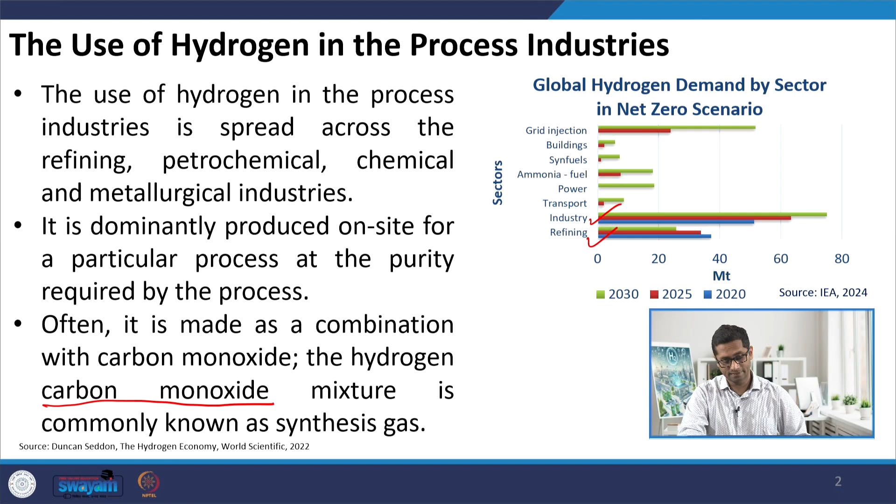So when I talk about oil refineries, we know that we are talking about a fractional distillation column, and the input to the fractional distillation column would be some kind of crude, and then this gives us different kinds of end products. The major end products that we might be aware of would be fuels like petrol, which is also known as gasoline, diesel. We might be talking about different kinds of gas. A typical gas that we use in our homes is LPG, liquefied petroleum gas, which is nothing but a mixture of propane and butane. And then there could be different grades of fuel oils as well.

This is what a typical refinery is doing, though not every refinery functions the same way, since operations differ depending on location, product demand, and the crude being processed. But generally, refineries trying to produce majority diesel and gasoline find that these two fuels tend to have a higher hydrogen to carbon ratio. For diesel, the hydrogen to carbon ratio is roughly 2, and it's somewhat lower for gasoline, around 1.8. But crude itself has a hydrogen to carbon ratio on the lower side, roughly 1.4 to 1.6.

Now, if I had to increase the hydrogen to carbon ratio of a fuel, how can I do that? There are three ways: I can either add hydrogen, or remove carbon in the form of carbon itself or as carbon dioxide. Different refineries function in slightly different ways and might adopt one or more of these methods. But the most beneficial way is to add hydrogen, because if you lose carbon, you inevitably lose energy, since carbon is also a big energy provider for these fuels. So the best way is addition of hydrogen.

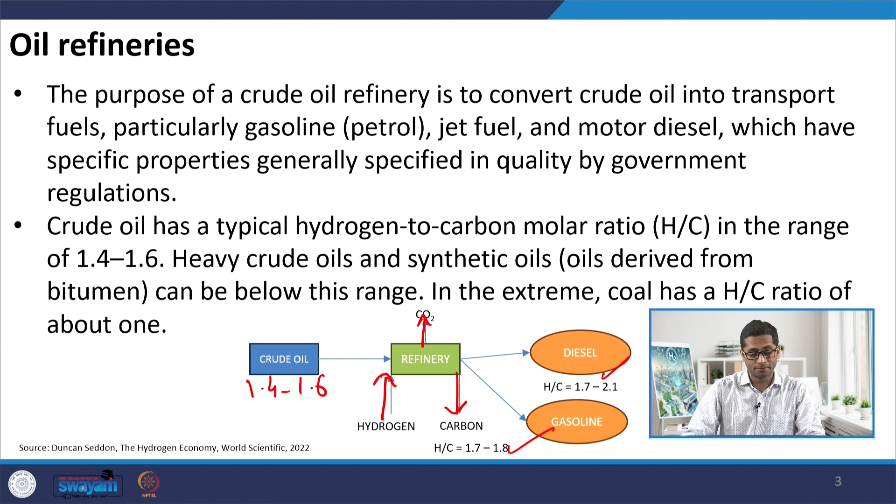Now, this addition of hydrogen has been going on for many decades. But we also notice that the use of hydrogen in refineries has been increasing over the past few years. Why would the need for hydrogen increase? We know hydrogen is needed to increase the hydrogen to carbon ratio of fuels like petrol or diesel, that makes sense. But why would the requirement increase over time? There are two factors behind this phenomenon.

One is the fuel quality, fuel standards, or emission standards that are becoming stringent day by day. Currently we use Bharat 6 standards; a few years back it was Bharat 4, before that Bharat 3. As we increase the standard to meet emission norms, fuel quality also needs to be upgraded. So if you want better quality fuel with less sulfur and other compounds, naturally you need more hydrogen for processes like hydrotreating, which removes sulfur.

Another phenomenon observed is that the crude we are importing, as time progresses, is coming from the heavier end of the crude oil spectrum. The lighter spectrum, which was on top, has already been utilized, and the crude we're extracting now is more on the heavier end. The result is we need even more hydrogen to process this kind of crude and come up with meaningful fuels we can use in our vehicles.

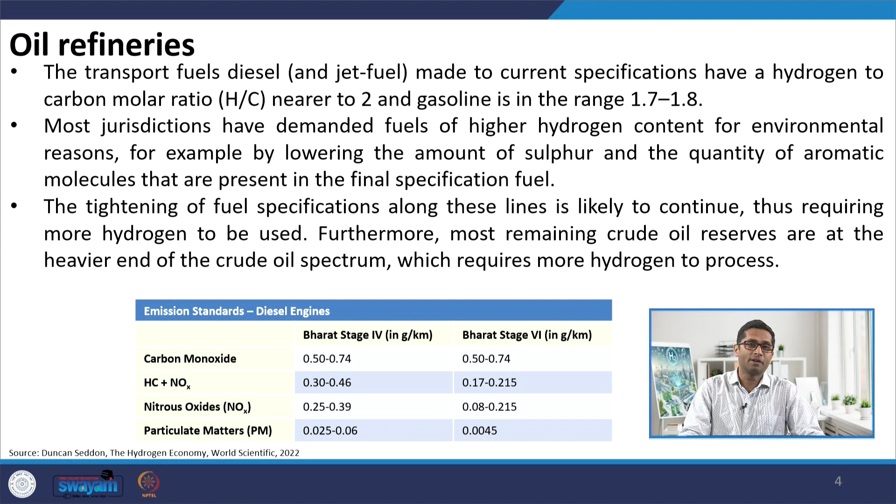So let me repeat: what has been happening in the past few years is that fuel emission standards have been becoming more stringent, so we need cleaner fuel entering our vehicles. And on the input front, the crude we are now extracting is coming from the heavier fraction, which needs even more refinement compared to earlier cases.

Now let us look at a typical refinery. Let me repeat that all refineries differ in one aspect or another, but this is what a typical refinery looks like. There could be modifications in diagrams from other literature, but to help you understand where exactly hydrogen is used in these operations, we have this small diagram in front of you. What is entering is crude.

This crude, after removal of water and a few salts, enters the atmospheric distillation column. On top, light gas escapes, and through the gas plant you get propane and other lighter gases, giving gases like LPG. This gas plant also produces butane and alkylates, used for conditioning gasoline. The middle products include different grades of naphtha, leading to gasoline, plus distillate leading to diesel. The heavier fractions go to vacuum distillation and might end up as fuel oil or other uses like asphalt.

Where do you exactly require hydrogen? These are processes called isomerization and hydrotreating, which go into almost all of the products found below naphtha, and there's also a process called hydrocracking. So these are the three main areas where you would require hydrogen. Plus, a refinery also happens to be a good producer of hydrogen - it's not that I'm only using hydrogen, I also tend to produce a good amount of it, primarily because of the naphtha reformer.

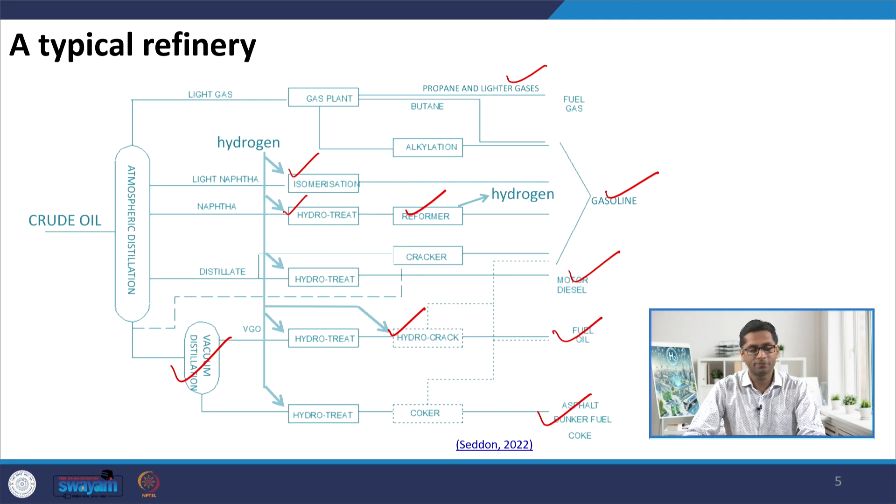Let us try to understand what all would be the aspects, and before that I'd like to give you the spectrum at which these kinds of products would be released - I am talking about the boiling points here.

If I'm talking about boiling points varying from 30 degrees Celsius to 196 degrees Celsius, I will be getting gasoline grade fuel. If I am looking from 196 to 235 degrees Celsius, it is basically kerosene and jet fuel. Above 235 going all the way to 360 degrees Celsius is diesel, and beyond 360 degrees Celsius boiling point I am going to get fuel oil.

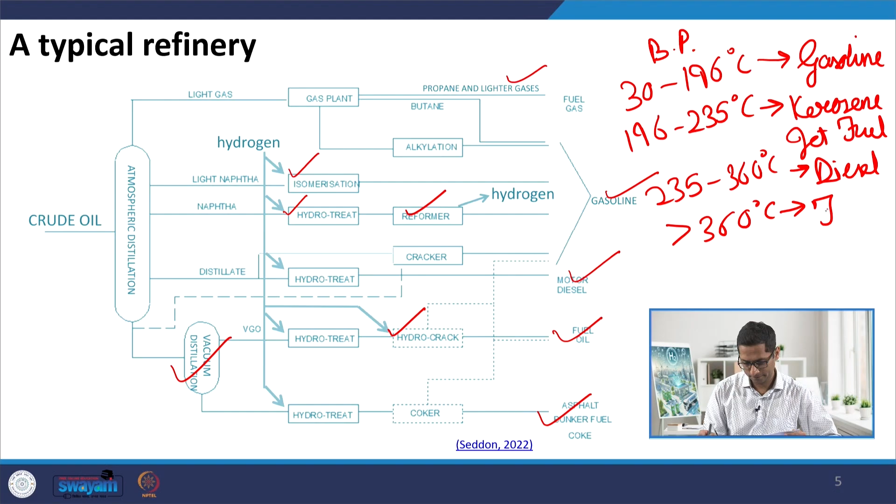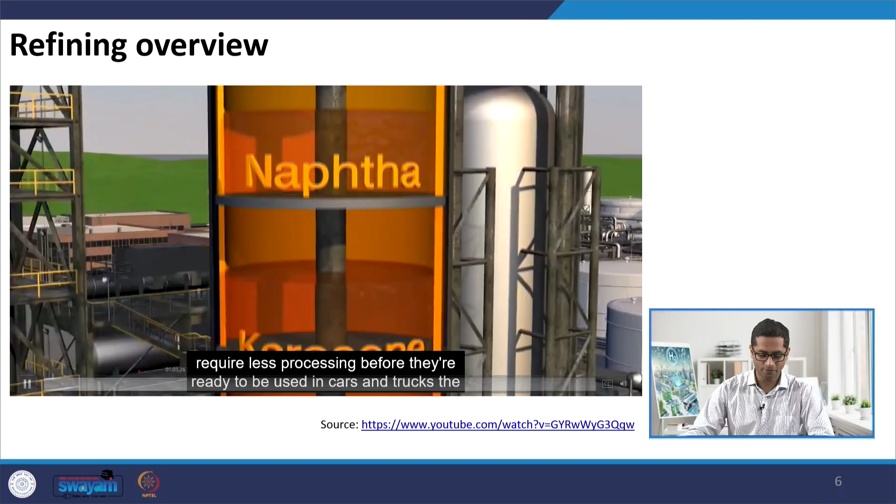Let us try to briefly understand these operations which require hydrogen in a refinery. Here is a video which I have adopted from YouTube - the link is there for your reference. This is a typical refinery, how it looks like. This is the distillation column, which separates the different aspects in terms of gasoline, naphtha, kerosene, diesel and heavy oils which might be coming in. They are just separated on the basis of the boiling point that we have.

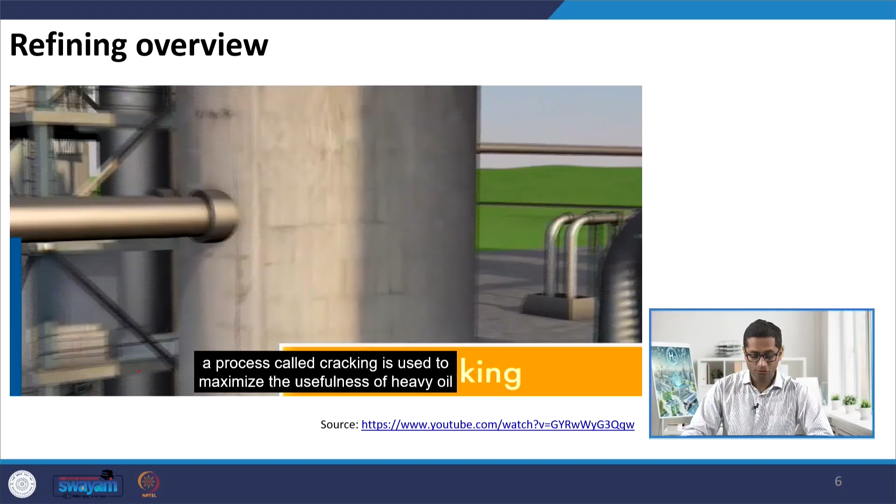But as you would see, there are a lot of processes, and one such process is called hydrocracking. In hydrocracking, we have many heavy oils or heavy naphtha which are long molecules. So for heavy naphtha, I am basically using catalyst and hydrogen for breaking these bigger molecules into smaller molecules, which could lead to an increase in the production of petrol or diesel, the primary products of a refinery. So what I am doing here is breaking bigger molecules into smaller molecules.

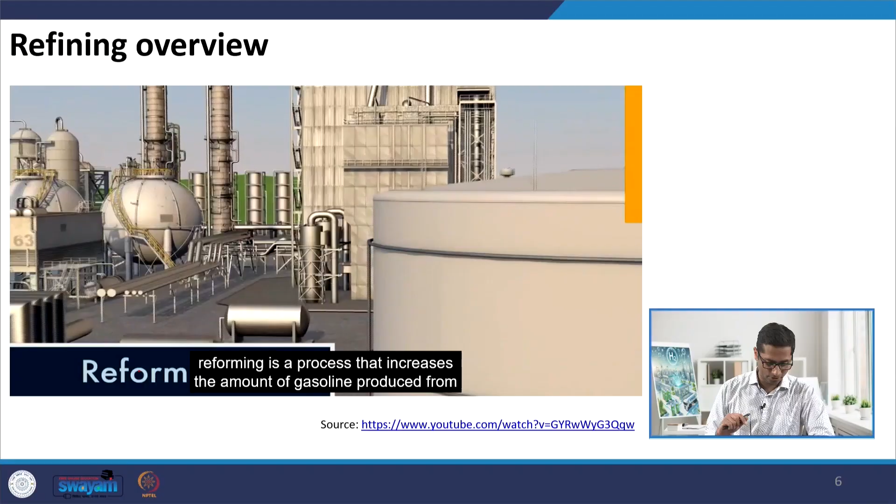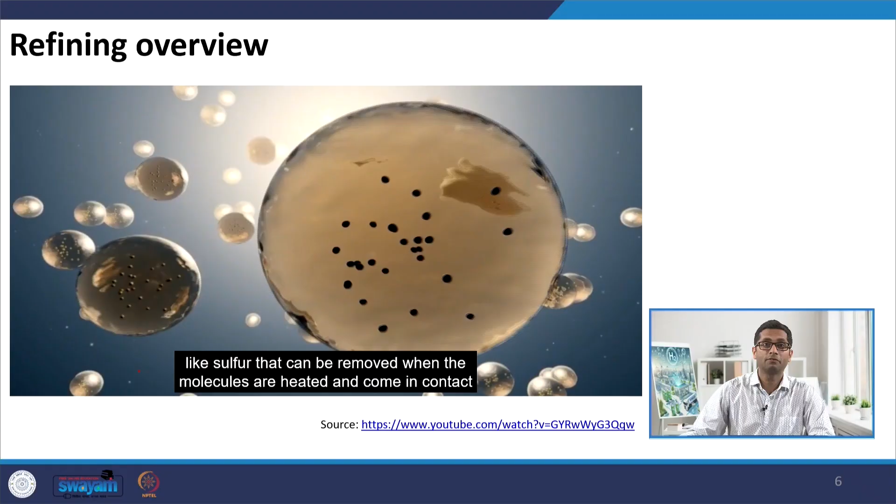Another process that is important to understand is reforming. Another is hydrotreating - here I am basically aiming to reduce or remove sulfur compounds from gasoline, the major product. The gasoline that we produce has sulfur impurities, and I could add hydrogen, which makes the sulfur escape as H2S gas, and this tends to consume somewhat of the hydrogen as well. The side products are basically used as fertilizers or other ingredients for the pharmaceutical industry. The major aim of these things is, of course, to increase the octane number of the fuel.

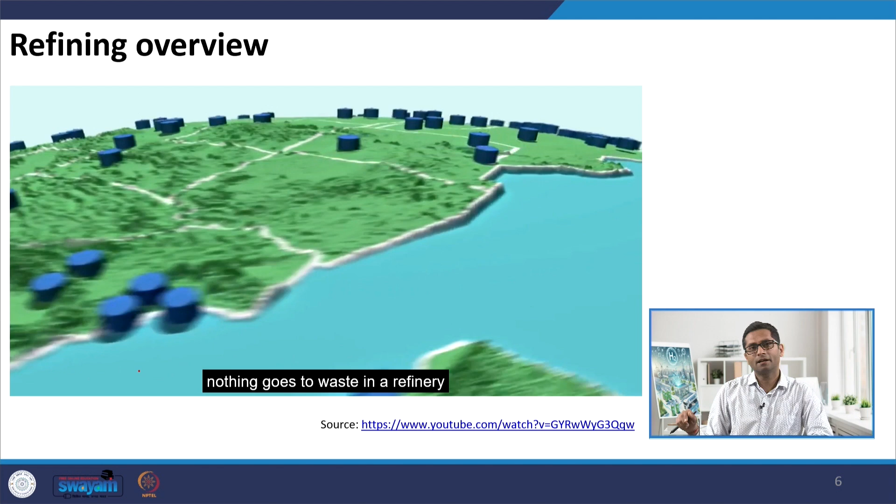Let us again try to understand this one by one. So the very first process in the refinery that is going to use hydrogen is the naphtha isomerization process. When I say isomerization, I am basically producing isomers in the naphtha range fuel - we all understand what I mean by isomers, compounds having the same molecular formula but different structure. So basically what I am doing is converting linear chain molecules into branch chain molecules. The aim here again is to increase the octane number.

So how does the process happen? You have the light naphtha entering, and after a dryer, you heat this naphtha and add hydrogen, to convert these linear chain molecules into branch chain molecules. It happens at roughly 200 degrees Celsius, and works best in the presence of catalyst, producing isomerate at the end. I'm telling you these things because I just want to explain the need of hydrogen in refineries - you are in no way required to cram or memorize these processes in detail.

If I talk about the consumption of hydrogen in a process like this, it would be of the order of 40 standard cubic feet, which is basically the volume per barrel of feed. When I am talking about standard cubic feet per barrel, this is a standard unit that is used in refinery processes.

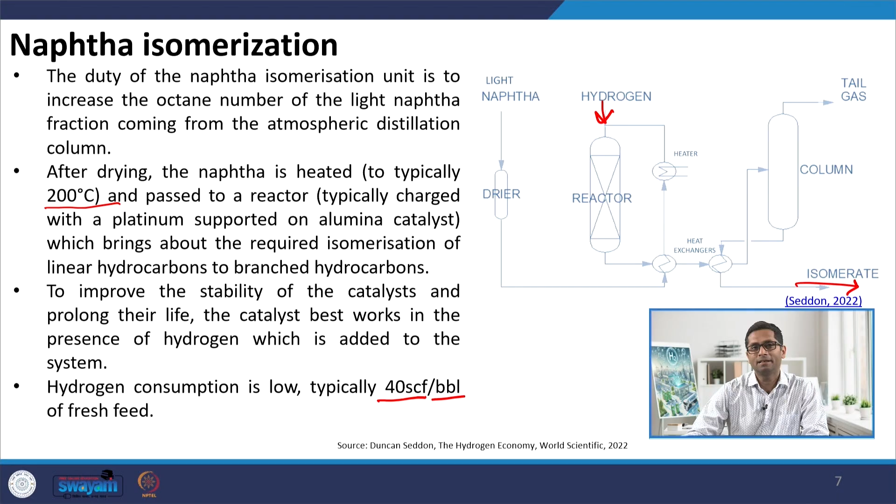But again, why am I so interested in increasing the octane number of the fuel? Because the isomerization process as well as reforming are basically aimed mainly at working towards the octane number of the fuel. Let us first try to understand that - for this we need to understand the basic difference between a petrol engine and a diesel engine.

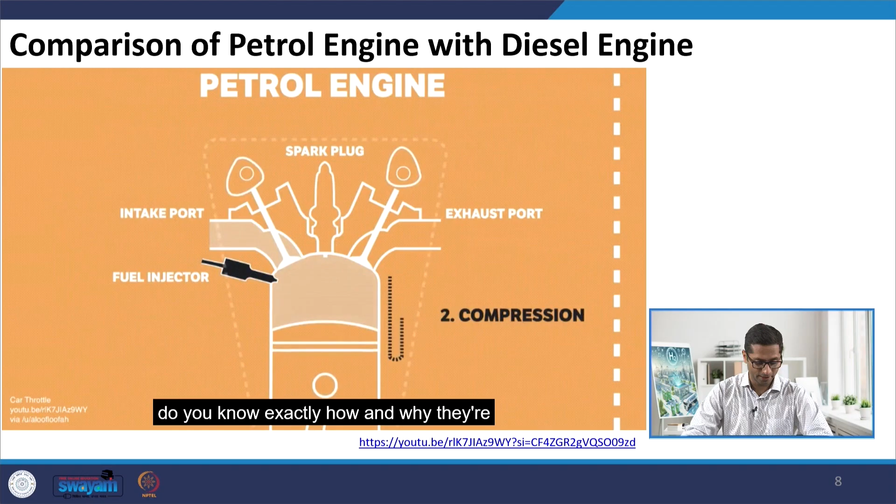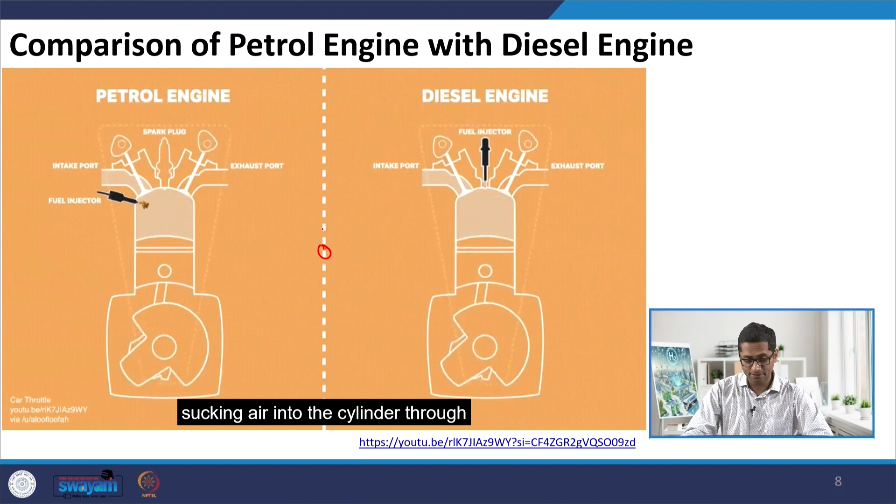When I talk about a petrol engine, we have something called a spark plug that causes the spark for the combustion of the fuel to happen. This is absent in a diesel engine. What happens in a diesel engine is that combustion happens because of compression. So if you look at the functioning of a petrol engine, during the compression stroke, combustion is made by the spark, and then we have the release of exhaust gases. Compare this with a diesel engine - there is no spark plug present here. The ignition happens during compression when the fuel is released, and the fuel gets spontaneously combusted because of compression.

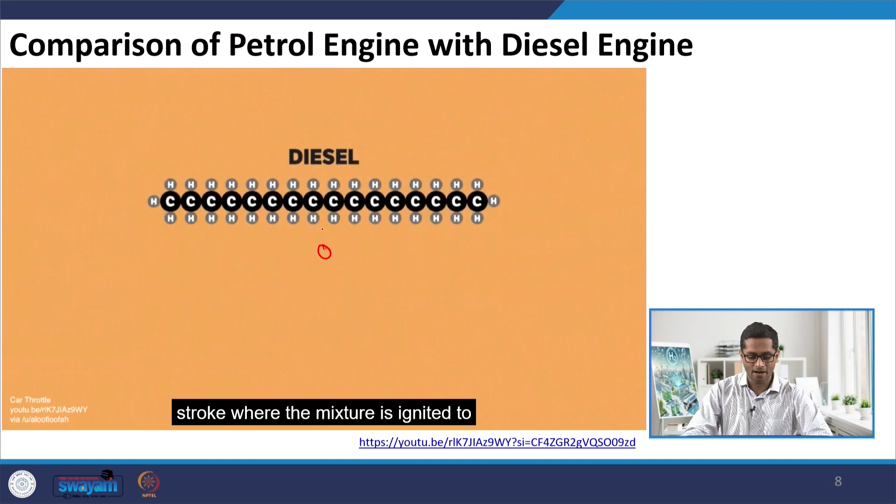We also understand that both of them deal with different kinds of fuels. Diesel deals with much bigger molecules as compared to petrol.

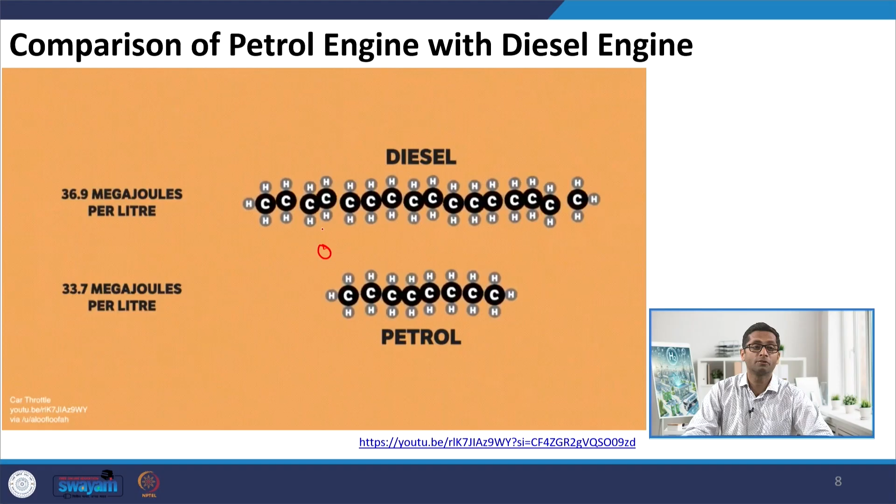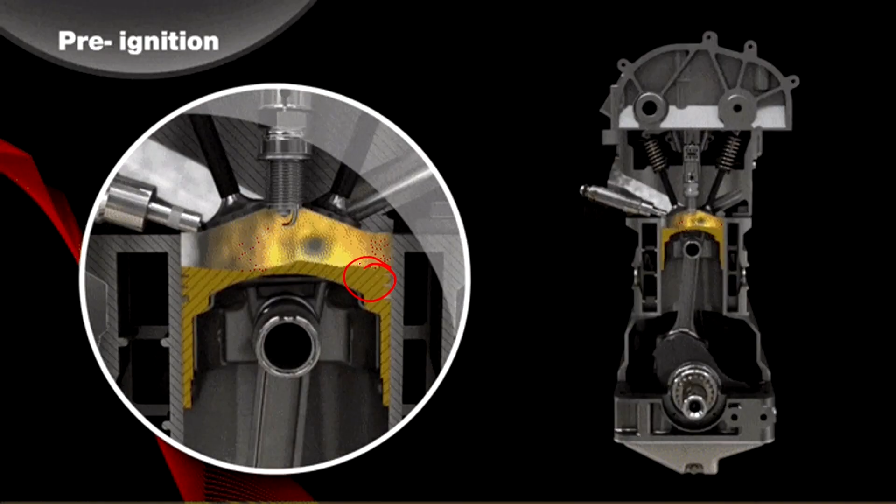What happens in a petrol engine when combustion happens because of compression even before the spark plug fires? This is what we mean by knocking - the combustion happens because of compression before the spark plug gets in. This is a normal IC engine, and you can see combustion was initiated in the compression stage just before the spark plug could plug in. This is not good for the efficiency and life of the engine, and that is why we would need a lot of pretreatment so that this phenomenon doesn't occur in reality. This phenomenon is called knocking.

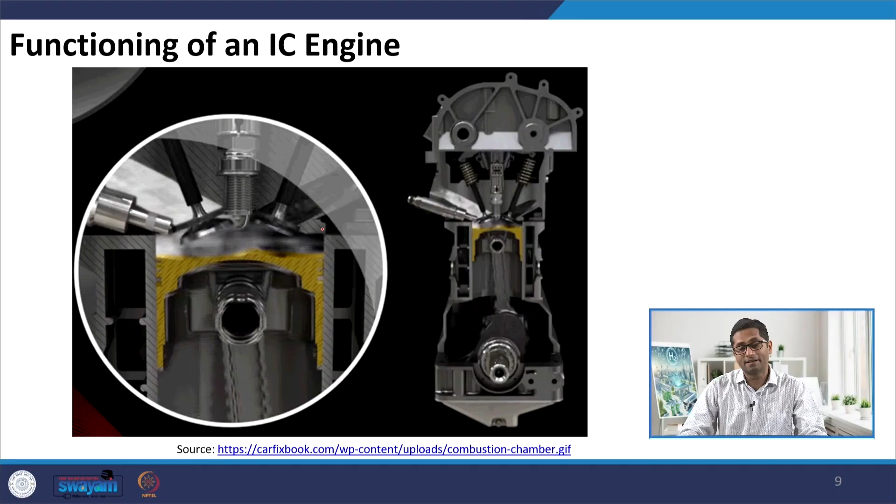To avoid this knocking phenomenon, normally we would use a high octane fuel so that it increases engine health and is also good for the efficiency of the engine.

Another place where you would normally use hydrogen is the hydrotreating of naphtha as well as the distillate. The aim of the hydrotreatment process is basically to remove sulfur from the streams.

Why would you need to remove sulfur? Because sulfur, whenever combusted, composes different grades of sulfur oxides, and when this is emitted through the tailpipes, it goes into the atmosphere, reacts with water, creates weak acids, and leads to a phenomenon in the long run called acid rain. This is why there have been a lot of problems with respect to the sulfur released into the atmosphere in the recent past.

So restrictions have been placed on the amount of sulfur that goes into the fuel, and normally this process is also called the hydrodesulfurization unit. It uses hydrogen which reacts with sulfur to create H2S gas.

The other advantages of this process - one major advantage is that not only is sulfur removed, it also removes some amount of nitrogen from the fuel, which is beneficial. Further, the removal of unsaturated molecules like olefins and diolefins also occurs, and it helps in the removal of polynuclear aromatics, also called PNAs, which helps in increasing the cetane number for diesel.

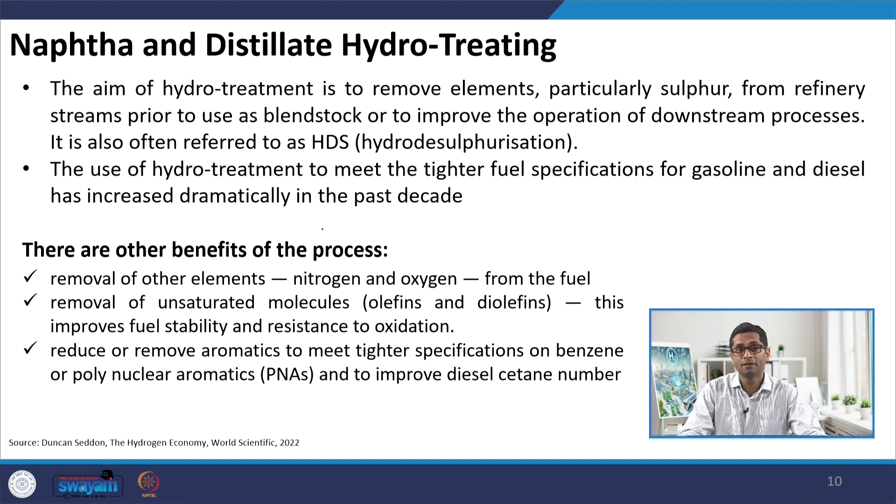Another added advantage of this hydrotreating process is that it tends to decrease the density of the fuel. As many of you would have noticed, whenever you go to the petrol pump, you pay per liter of fuel rather than per kg. So if I'm leading to a decrease in density of the fuel, I'm possibly increasing the volume for the same weight of fuel, and this is also an advantage of the hydrotreating process.

If I wanted to explain a typical hydrotreating process, the major feedstock is gas oil, which needs to be heated before entering the reactor. This reaction normally occurs at around 320 degrees Celsius with the help of a catalyst - normally cobalt molybdenum on an alumina support - and you would have hydrogen entering here.

The sulfur gets separated in this reactor, which needs to be removed through different grades of separators, and finally you would have another distillation column downstream which will be removing either the naphtha or the diesel grade fuel.

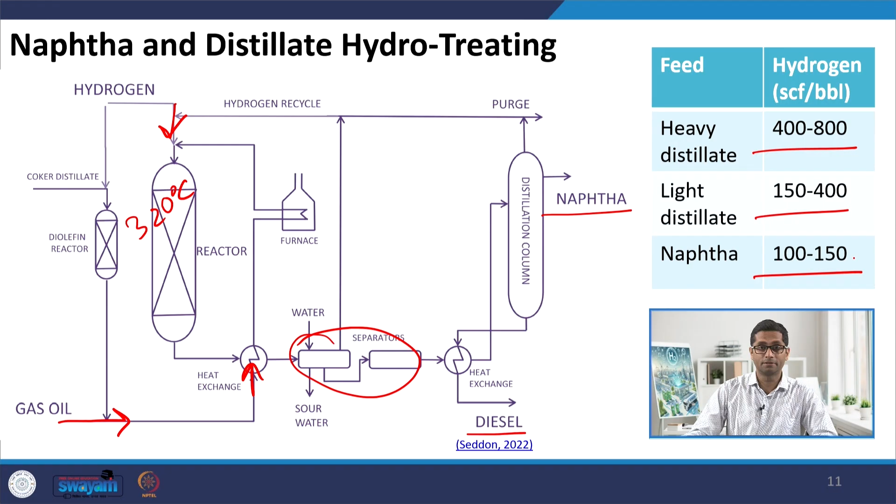Based upon the type of input fraction entering the hydrotreating process, you would have different requirements of hydrogen, but somewhat greater than the isomerization process. Also, we need to understand that because of technologies like this, sulfur emissions have been widely controlled in the atmosphere.

If we talk about conditions a few decades back, sulfur oxides leading to acid rains was a big problem in Europe and the developed parts of the world. But because of consistent policies adopted for fossil fuel use, requiring treatment of sulfur components, there has been a drastic reduction. Over the past two decades, sulfur emissions in the US and Europe have come down drastically. In Asia too, we are on a downward trend, which is one of the reasons you don't hear about acid rain much in popular literature now, though this has been achieved only in the recent past.

Another place where hydrogen is used is hydrocracking. In a hydrocracker, we want to break bigger molecules into smaller ones, leading to increased production of fuels like diesel or gasoline grade fuels. This process occurs at elevated temperatures of around 400 degrees Celsius or more. Gas oils enter, and the first reactor is similar to the hydrotreater discussed earlier. Then the hydrocracker breaks the bigger molecules into smaller ones, followed by a distillation column that separates diesel and naphtha grade fuels. This is one place in a refinery with significant hydrogen requirement, typically of the order of 1000 to 3000 standard cubic feet per barrel of feed.

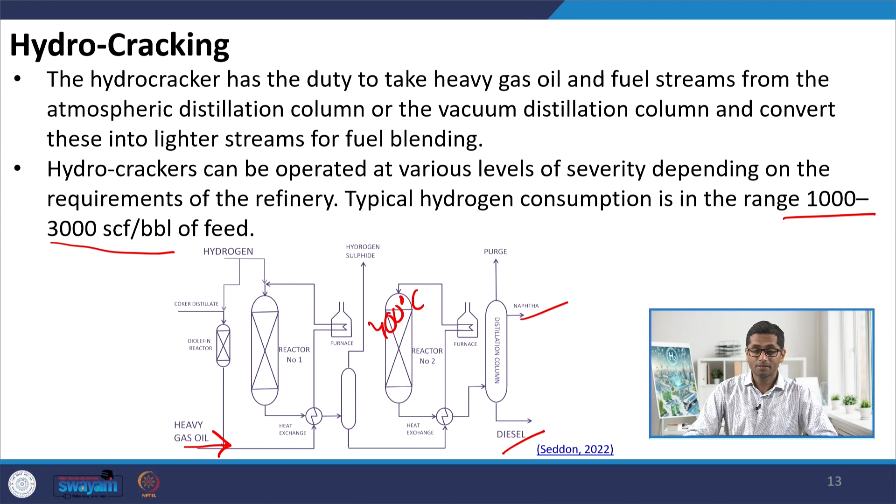These are the three main places where hydrogen is required. What about hydrogen production? That happens in the naphtha reformer, where aliphatic compounds like paraffins or cyclic compounds like naphthenes are converted into aromatics like benzene, toluene and xylene. The primary aim is to increase the octane number. If I change the structure of a paraffin with a research octane number of zero, first to naphthene and then to aromatics like benzene, it leads to significant hydrogen production and an increase in the fuel's octane number.

These processes are undertaken to maintain a steady octane number for the fuel a refinery generates. Different grades of fuel are produced based on octane number—you may have heard of normal petrol and extra premium petrol, the difference being the octane number. This process also produces significant hydrogen, of the order of 500 to 1300 standard cubic feet per barrel.

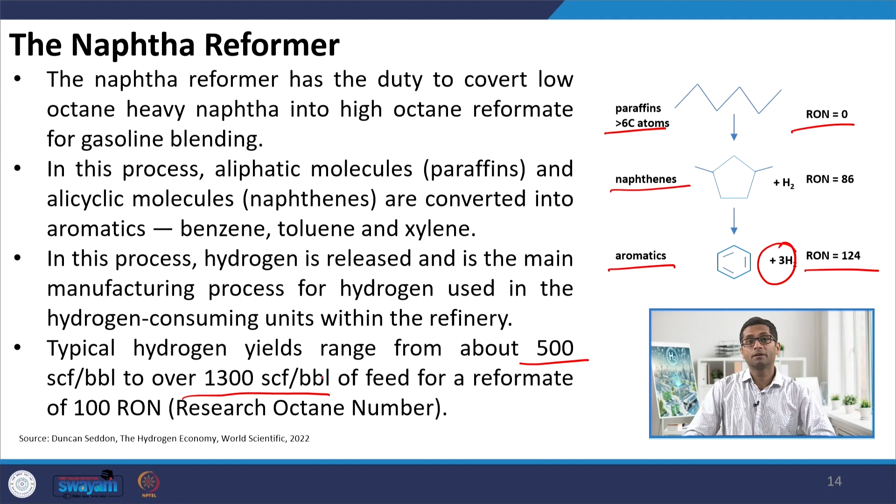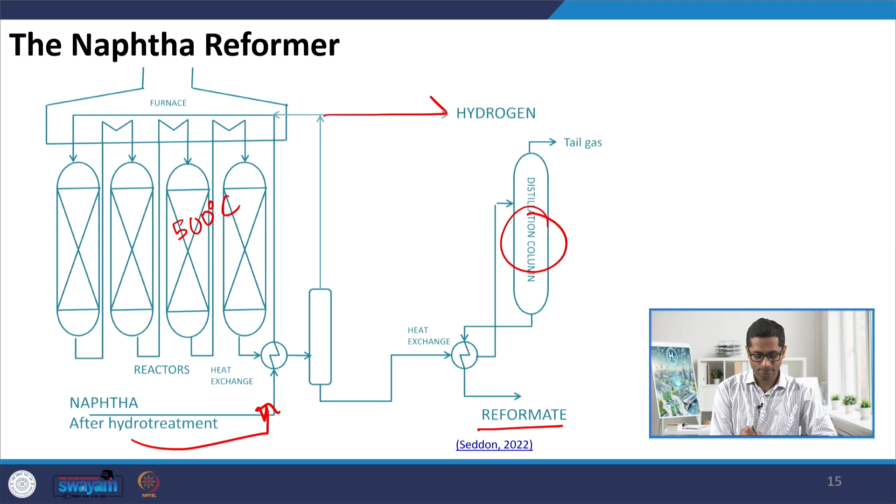In terms of plant operation, naphtha comes in and needs to be broken down into different fuels. First, naphtha is heated, then passed through different reactors acting in series, typically at around 500 degrees Celsius. Downstream, distillation separates the different grades of fuel, and hydrogen goes out as a byproduct of this process.

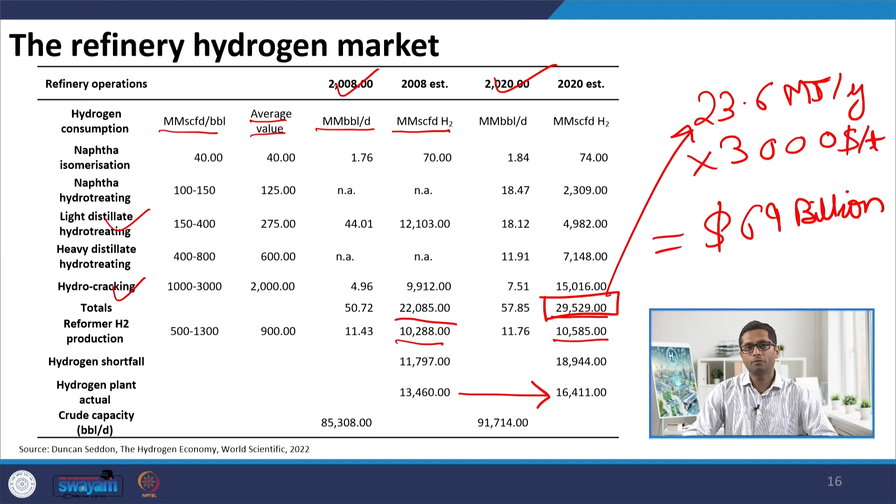Another place very close to the refineries where you would have the application of hydrogen would be petrochemicals. Petrochemical complexes are normally very close to the refineries because that is where the major feedstock comes from. When I say petrochemicals, I mean the different kinds of products that we use day in and day out.

If you look around the room you might be sitting in, there will be a lot of petrochemicals. The major grades of plastic you're using are petrochemicals. The synthetic clothes you would be using are petrochemicals. The different equipment, maybe mobile phones, laptops, computers or the workstation through which you are watching this video, would have a significant amount of petrochemicals forming the raw material.

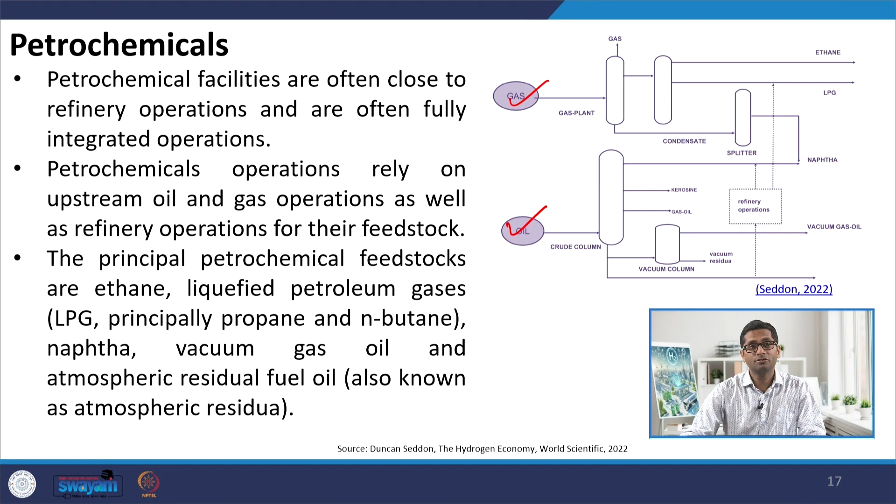So we use a lot of petrochemicals throughout our life, and the major feedstock again remains gas and oil. But in the petrochemical sector, both the products as well as the input material tend to have a hydrogen to carbon ratio of roughly around 2, which means there is no significant requirement of adding hydrogen from outside. But some processes produce hydrogen and some consume hydrogen, and let us try to understand these processes in detail.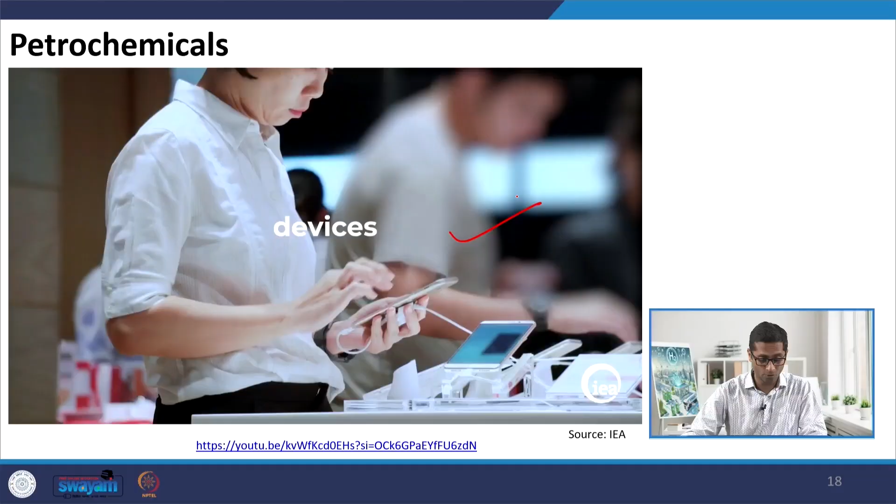With the help of this small video you can see how many petrochemicals are around us. They start with the oil and gas industry, and these plastics or wraps are petrochemicals. The fertilizers that we use, the clothing, the devices, the tires all come from petrochemicals, and this is expected to be a big driver for global demand instead of the fuels used for different grades of transportation.

In petrochemicals, there are different areas where hydrogen is getting produced or used. One process where hydrogen gets used is naphtha hydrotreating. As we discussed in the earlier slides, hydrotreating basically removes compounds like sulfur through the addition of hydrogen. And as the conditions for fuel use become more stringent, the requirement of this hydrogen is also growing.

This is one place where I would be using a lot of hydrogen to bring down the sulfur compounds, and it also helps in the final distillation by removing the heavier components that would otherwise cause problems like coking. That is avoided with hydrotreating, and it also makes processes like steam cracking easier.

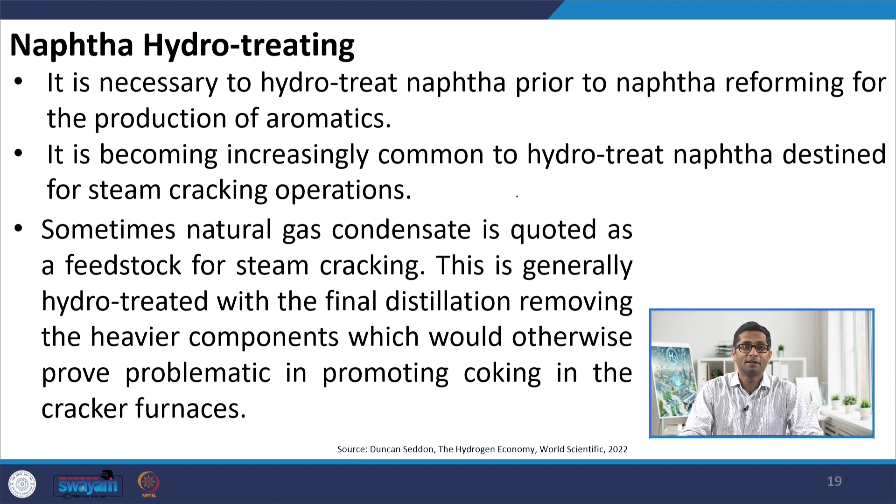In petrochemical complexes, one of the major products is different grades of polythene: low density polythene, high density polythene, or linear low density polythene, produced mainly through a process called steam cracking. Whenever I use steam cracking, hydrogen comes out as a side product, and the hydrogen from steam cracking is used in other processes like naphtha hydrotreating.

Another area where I will be using hydrogen is the downstream processes, specifically the polymerization process. Whenever you are forming polymers leading to different grades of plastics, it needs a chain termination step wherein the use of hydrogen is important. Further, hydrogen also helps in removing the olefin groups.

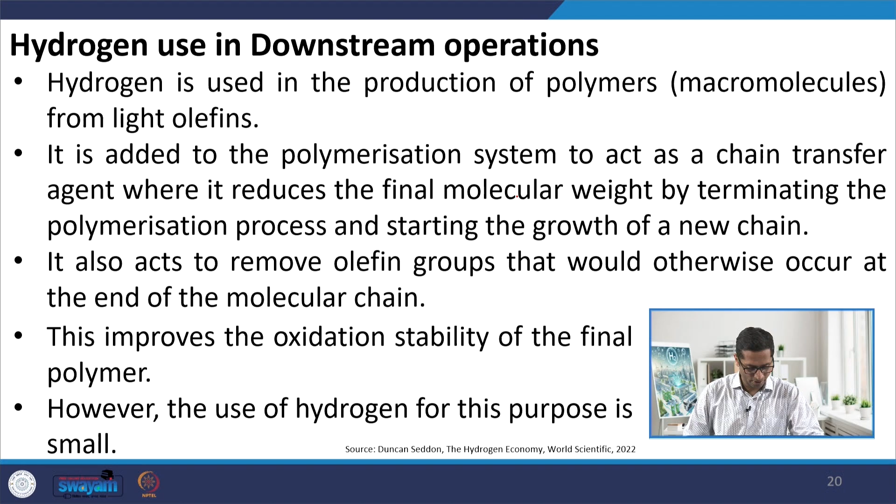So when I say olefin, these are the double bonds which might happen, and hydrogen helps in preventing unnecessary creation of these olefin groups. And further, it also helps in the oxidation stability of the final polymer that might be produced. But again, the consumption of hydrogen for this is not very significant.

Another area where hydrogen would get produced would be the naphtha reforming. This naphtha reforming, again, we have slightly discussed in the previous slide. So what is happening in the naphtha reformer is we are converting the aliphatic molecules to aromatic molecules, and this produces a significant amount of hydrogen, but this hydrogen again would get utilized in the complexes.

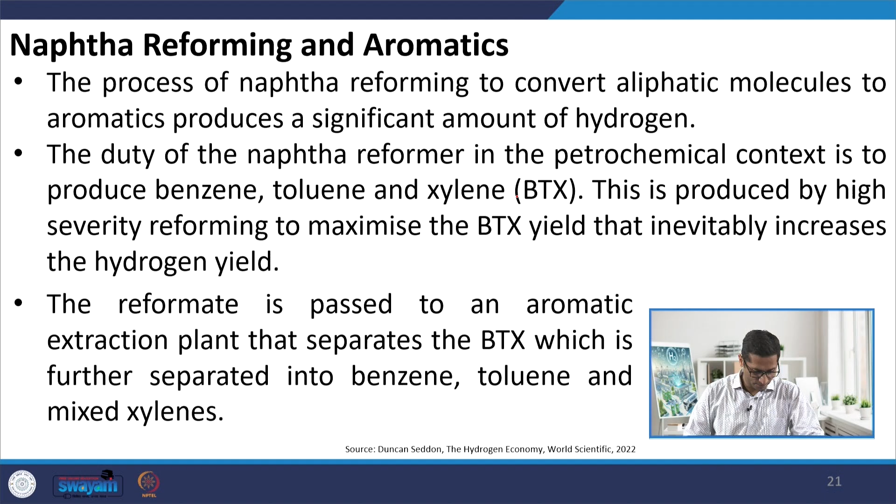And one of the major products of this naphtha reforming will be the compounds known as benzene, toluene and xylene. Now these three chemicals happen to be important compounds such that they form the precursor of many of the chemicals that we use in day-to-day lives. Just to give you an example, you would have a diagram here where you see the whole range of end chemicals that you can get from these three chemicals, which are benzene, toluene and xylene.

And if I look at the market projections, you can see that these three chemicals are going to grow rapidly in the coming few years. So if I consider from today till 4 years in the future, we can see that the consumption of these chemicals in the form of benzene, toluene and xylene might almost become double. So it is also proposed that in the future a lot of growth in terms of the petroleum products is going to be propelled by these kinds of compounds.

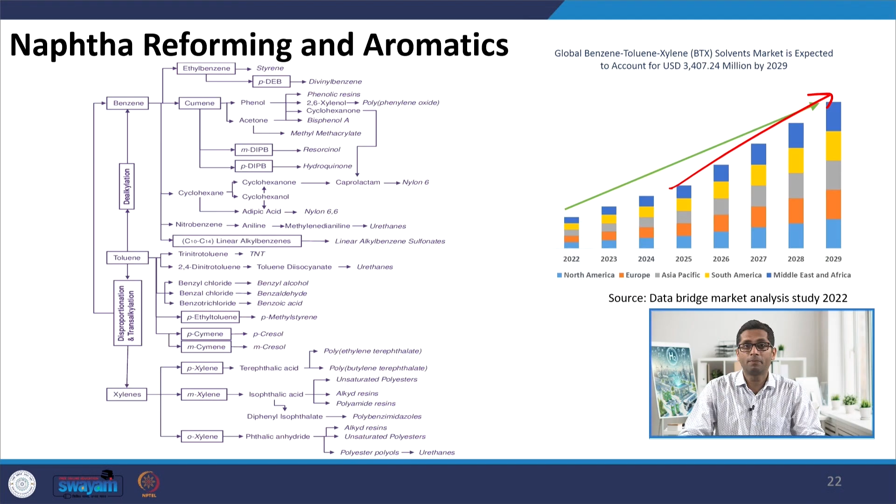Let us also briefly try to go through the application of these petrochemicals in the form of three chemicals. The first one is benzene. So I believe we all have heard about the chemical benzene, which is a 6-carbon ring, and it happens to be a major precursor for cyclohexane. And if you remember your school days, cyclohexane is one molecule which is used for the production of nylon 6 or nylon 6,6. Now these are the major polymers that you would be using.

Further, benzene is also used for production of polystyrene. So what is polystyrene? You would have seen these kinds of packaging material. It's basically a thermocol that we use for packaging of any electronic product, and this is where polystyrene is used. Another major use is the creation of acrylonitrile butadiene styrene, which is a hard grade of plastic basically used for toys. If you have seen the Lego toys or similar blocks which children play around with, this is nothing but the ABS being used.

Another molecule is toluene. Toluene as such has no direct use, but it is used for the production of benzene. But an important thing about this benzene and toluene is that they might play a bigger role, as we will be discussing in the future classes, in the transportation of hydrogen over long distances. These can form the organic hydrogen carrier, which can help in the transportation of hydrogen in the long run.

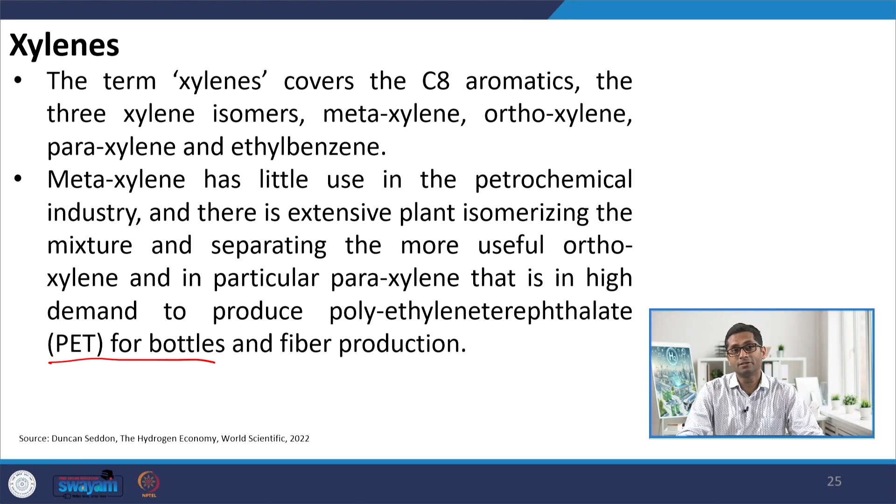Another major molecule is the xylenes, which are basically C8 aromatics, and they happen to be either in ortho, para or meta form. We don't have much application for the meta-xylenes, but we have a good application of ortho- and para-xylenes in the market, and a major application lies in the production of the PET bottles, which we have been using day in and day out for consuming different kinds of beverages or liquids. So this is where a major application lies, and further in the fiber production as well.

Other major chemicals coming from the petrochemical industry would be the oxo alcohols. So oxo alcohols are basically alcohols coming from the oxo process, and the process is simple. You have olefins made to react with carbon monoxide in the presence of hydrogen, leading to aldehydes, and further these aldehydes in the presence of hydrogen lead to the production of the oxo alcohols. A major area where the oxo alcohols would be used would be the production of detergents.

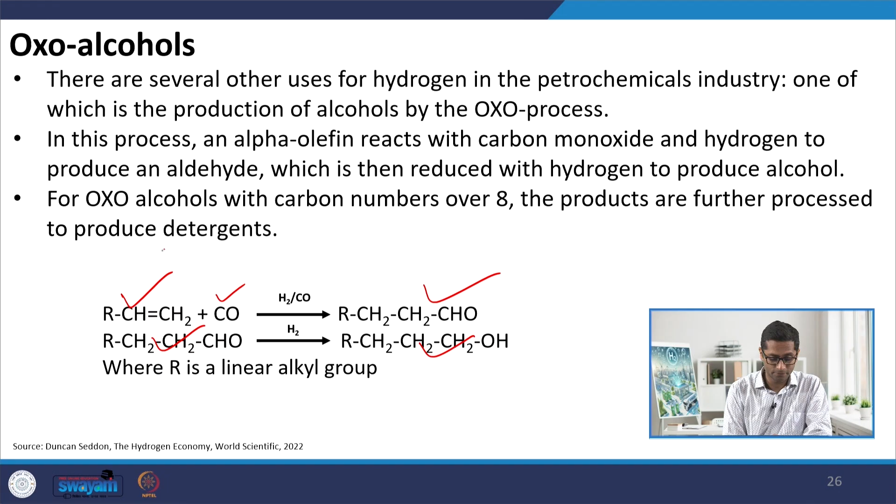So with this, we have tried to briefly tell you about the application of hydrogen in the refineries and the petrochemical sector, and hydrogen seems to have a good amount of application with respect to these complexes. Further, we also need to understand that in many of these applications, hydrogen is both produced and used locally, and that is why you don't see much transportation of hydrogen happening. But this is one area where hydrogen seems to have a good application presently. This might decrease in the future, but it still has a great appetite for hydrogen.

So with this, we take a break for the current class, and in the next class we will be discussing the application of hydrogen in the chemical industry.